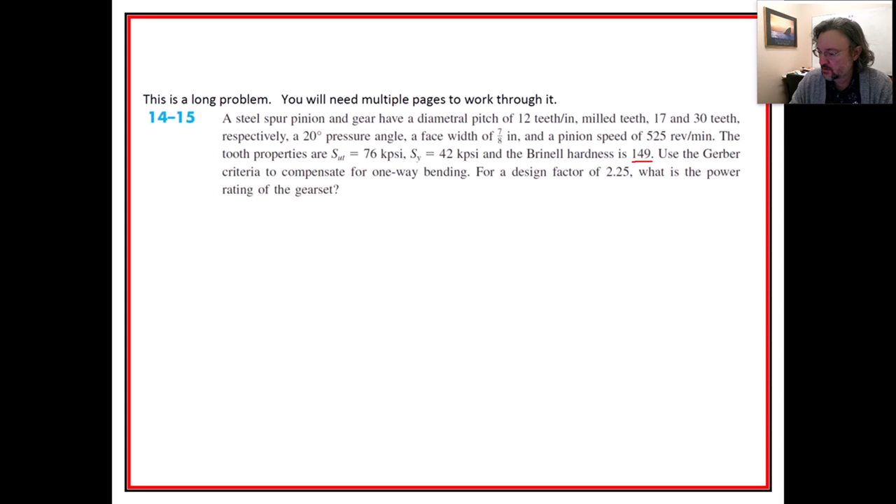So let me see. I'm going to pause it for a second and I'll be right back.

Okay, so here is the problem, and I will try to annotate this and explain the differences with their expectations and also where certain things come from, right? So first off, we know from this problem that we have 17 and 30 teeth. So we look up from table 14.2, and we're able to find what the Lewis form factor is going to be for the 17 teeth right here and the 30 teeth right there. From those, we also get the diameter of both the pinion and the gear by taking the number of teeth divided by the pitch, which is 12.

We get the pitch line velocity, V, from the pinion diameter and the RPM. So we get 194.8 feet per minute. And then we're going to use equation 14.4b for the dynamic factor, so it's a pretty low 1.162, and then for the endurance strength, right? So we want to try to get for fatigue the Se prime by taking 1/2 of the ultimate strength, which they told us was 76, and so we get that.

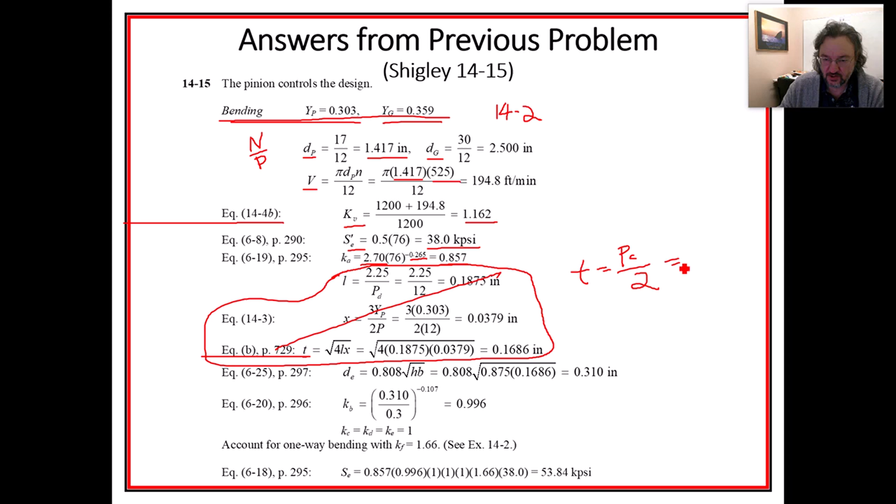Now this is where there's some deviation. This is the method that they show in the example, so we're not going to do this part right here. They're doing this to get the tooth thickness; instead, I'm just going to take 1/2 of the circular pitch, and so all of a sudden my numbers are going to start being different. That's going to be pi divided by the pitch divided by 2. And so if you do that, I don't really like writing with the mouse, but 0.1309 inches is what I get.

So there's the equivalent diameter. I'm going to stick my tooth thickness of 0.1309 in here, and I get an equivalent diameter of 0.2735 inches. Okay. And so when I put this inside there, I actually get a number that's larger than 1, which is not typical. I have 1.010.

And then I don't do this next part. They're using the Gerber thing from that example, and they used this as the miscellaneous factor. I don't like using the miscellaneous factor. By the way, we've already established that the KB was just slightly different. It was like 99.6%; on the other one, this is 101%. There's not that much difference. But anyway, by getting rid of that 1.66, I get 32.57 KSI.

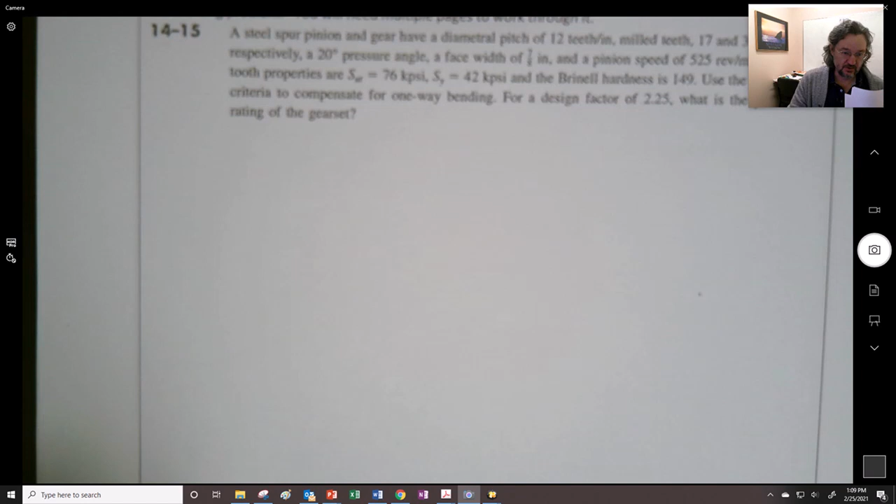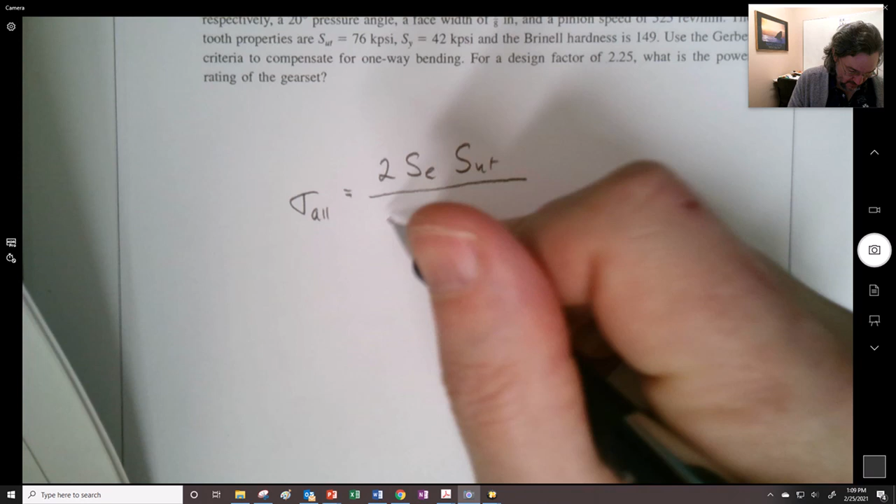So I need to maybe break away from this piece right here, and maybe I'll write it out separately down here. I'm trying to save time, but I don't know if it's saving any time. But what I had done, make sure that we say that the allowable stress is going to be 2 times the endurance strength times the ultimate strength divided by safety factor, ultimate strength plus endurance strength, and then put your KF right in there.

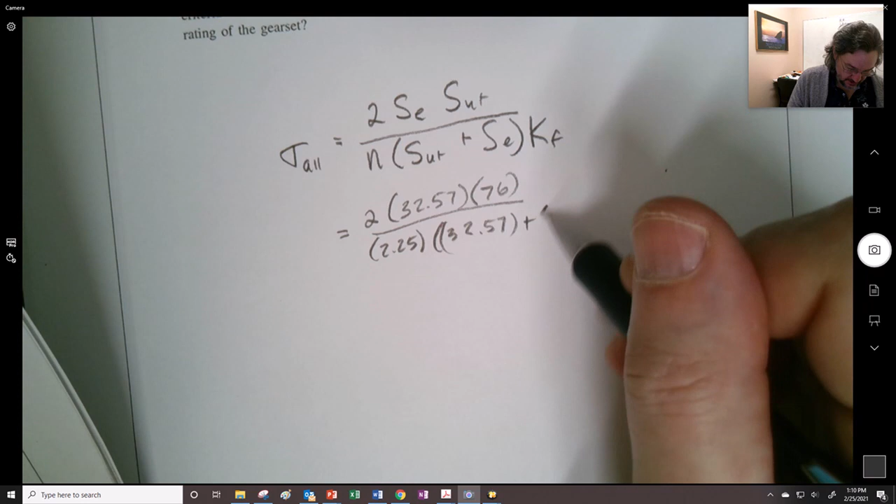So when I put in here for this, I said it's going to be 2. Here's my 32.57, the endurance strength I found, 76. My safety factor was 2.25, and then I had 32.57 plus my 76, and then my 1.31, right? So all of that, and I got my allowable was 15.48 KSI, right?

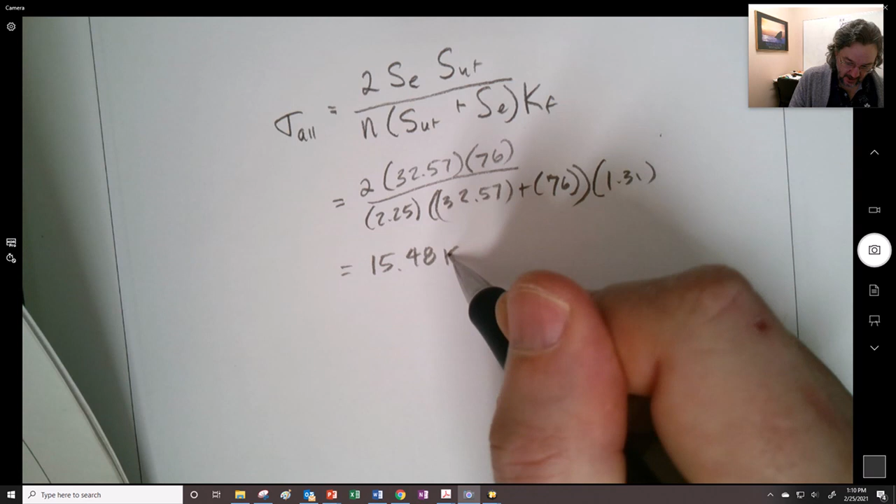So coming back to what we had right here, instead of this right here, I get 15. Did I say 14? I think it was 14. I said 15.48 was my KSI. And they write PSI next to there, so they have a little typo, by the way. See that little typo they put in there? Okay. So I put that in there instead of what I had, and I think everything else here is the same.

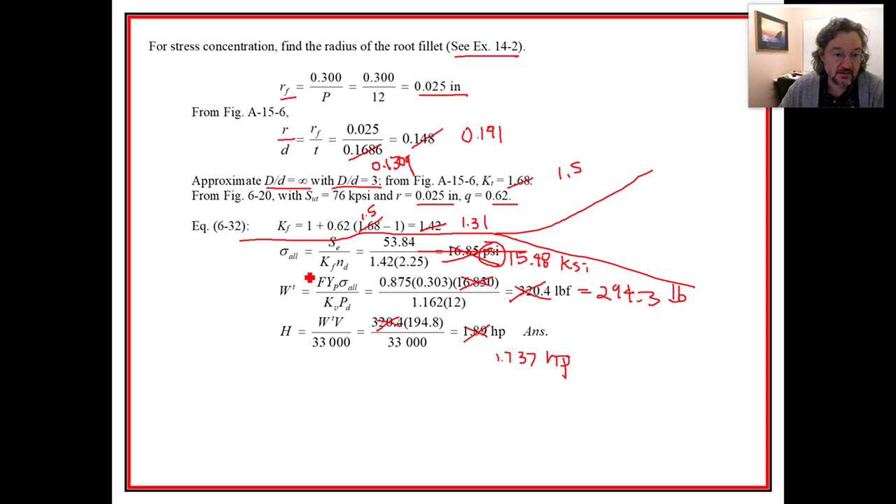And so what I end up getting is 294.3 pounds. And so switching that out right here, putting that into the place, I find that I get 1.737 horsepower. All right, so that's going to be the limiting horsepower based on bending right here, I think. Is that true? Yes, right here, because I was using this equation right here, the Lewis equation for bending, but just rearranging it, right, so to solve for our amount of force.

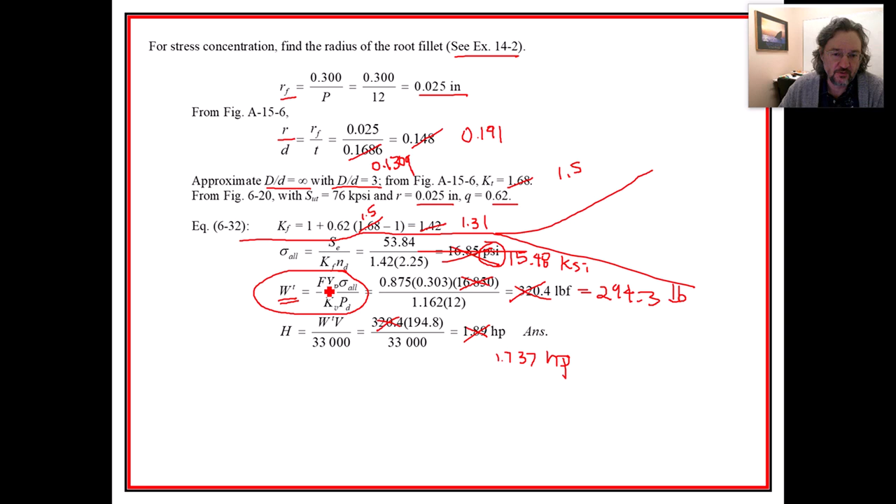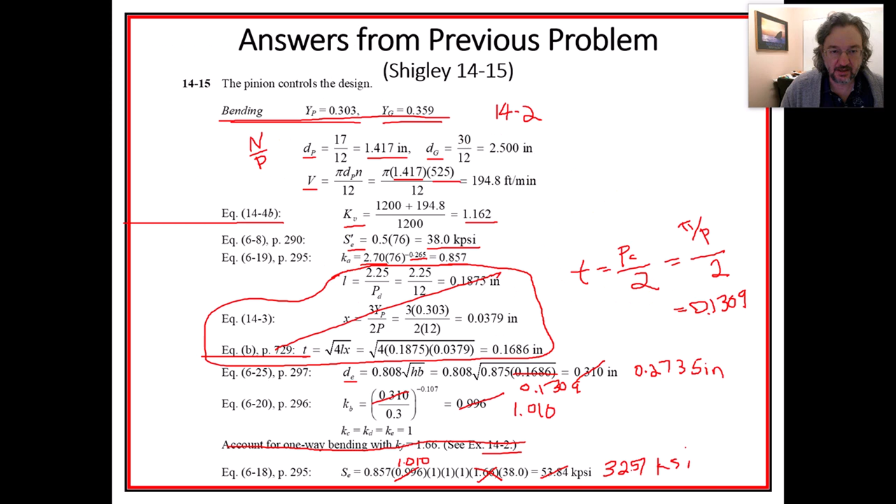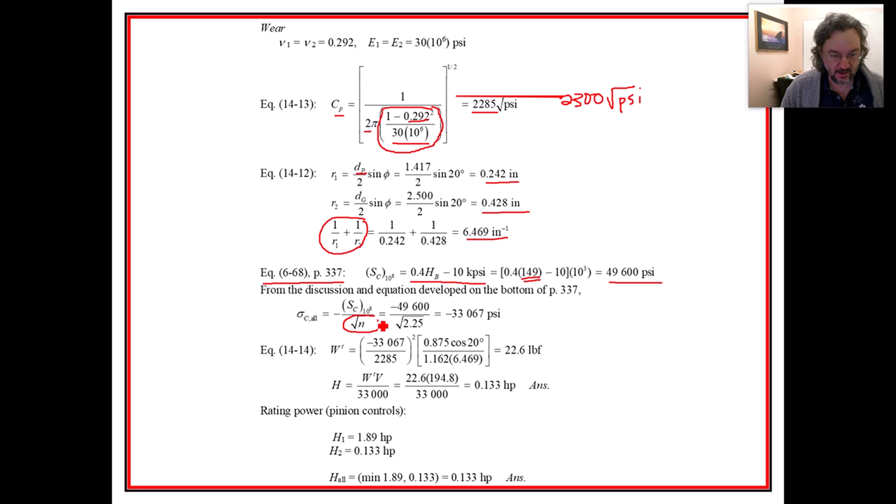And then they went ahead and they used that square root. Did I change that at all? No, I went ahead and let them do that, where they're taking the square root of the safety factor. Now, in this case, it's a design factor, right, because we're using it in this direction. And they said, okay, here is what the allowable contact stress is going to be. And if you look right here, they went ahead and they rearranged this equation right here.

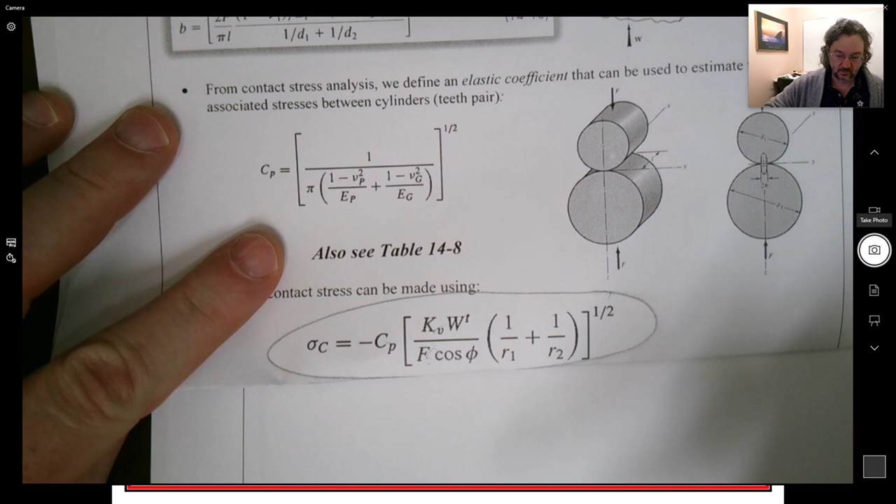They rearranged this equation and they solved for this. They also went ahead and they put this in here as like one thing, so it's not quite obvious when they're doing that. So you can see here's the R over the R that they did up here that they stuck in there. But they rearranged the thing. You see that they squared this. So they get 22.6 pounds.

And now you can see from the results that they get 0.133 horsepower, right? So now you do this comparison between the two things, and you can see 1.89 based on bending strength or bending fatigue, and then you get 0.133, so a lot smaller horsepower capacity. But that's like if you never want the thing to wear, right? If you never run the thing more than 0.133 horsepower, the teeth won't wear out. But that's just not going to happen, right? So you can see that things are much more sensitive to wear.

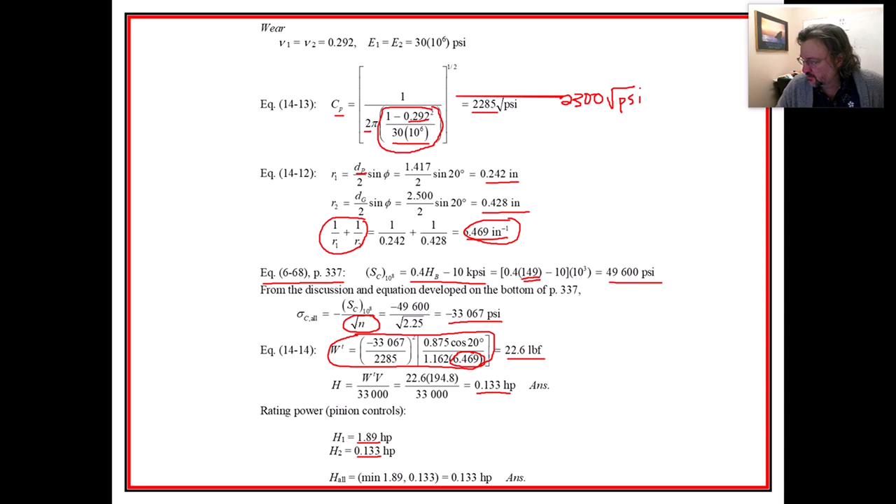So that was working through a separate example. I thought maybe that would be a useful thing. I never get to it in this class. The class is always too long, so I think it's good that I have it written out in this way. And we'll often post the solution just for people to see. So I'll also do that in this case right here, so you can work through it. So there you go. 15 minutes, 14 minutes.